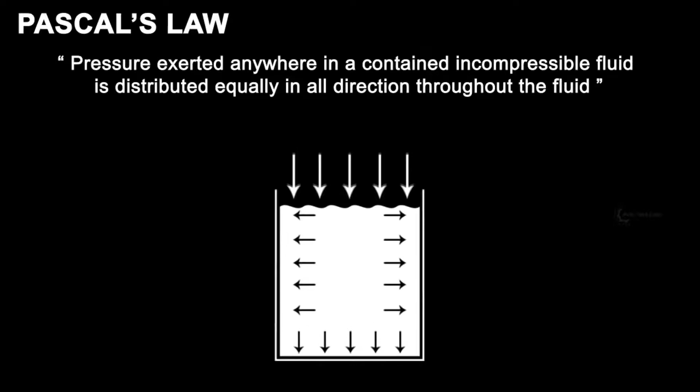Our design uses the principles of Pascal's law, which states that the pressure exerted anywhere in a contained incompressible fluid is equally distributed in all directions throughout the fluid. As the driver applies a force on the brake, the same force is distributed to the pressurized fluid. The force is then amplified by increasing the contact area near the brake pad.

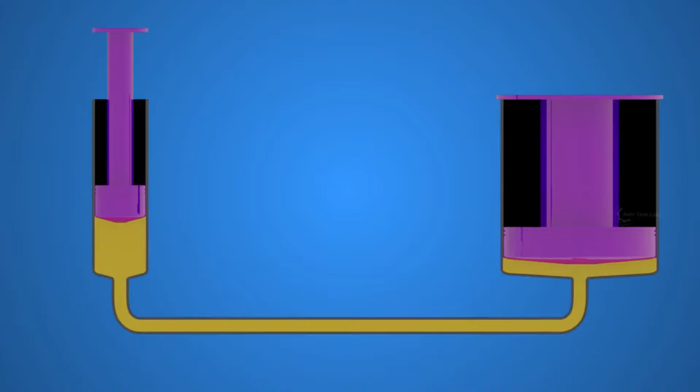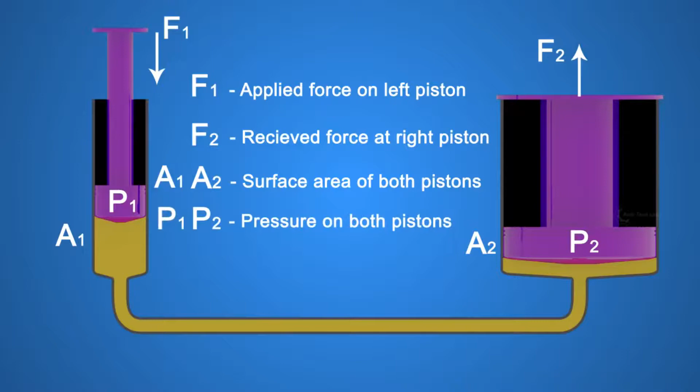This force provided from the driver allows the first brake pad to come in contact with the rotor. As the first brake pad comes in contact with the rotor, the equal and opposite force exerted by the rotor is then transferred to the caliper frame, translating the system in order for the second brake pad to come in contact with the rotor. The frictional force provided by both brake pads decelerates the rotor, allowing the vehicle to stop on demand.

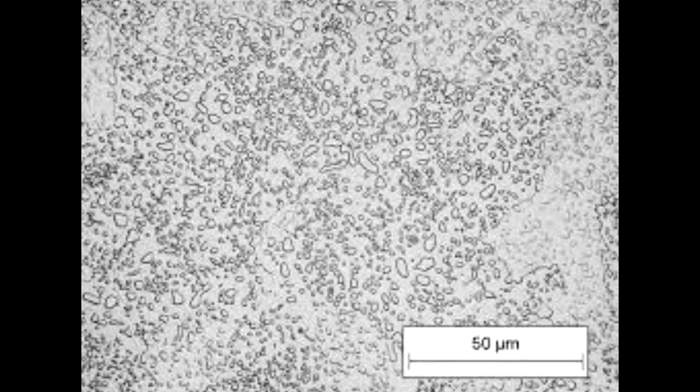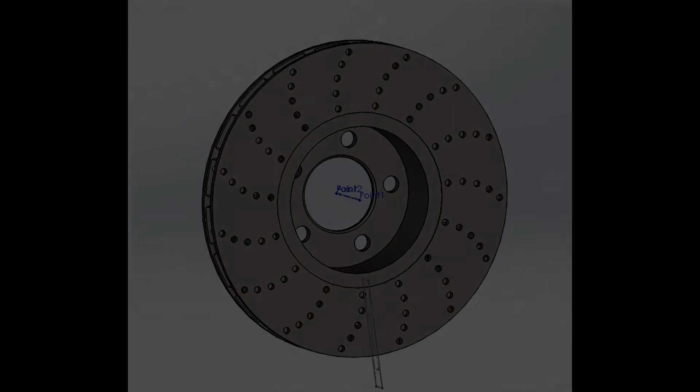Our design consists of several parts that are essential to building the product. Most parts are made of cold-drawn steel, such as the rotor, frame, screws, brake pad, and the connecting rods. The rotor has a diameter of 290 millimeters and is 50 millimeters high, with a mass of 6 kilograms. The frame has a length of 252 millimeters, 100 millimeter width, and 100 millimeter height, with a mass of 2 kilograms. The screws have an 8 millimeter diameter and a weight of 4 grams.

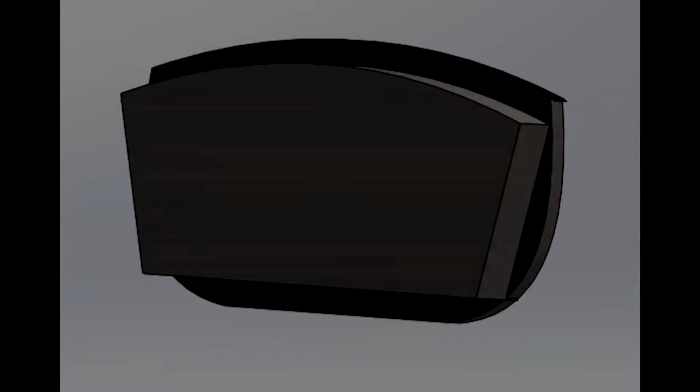The brake pad has a length of 120 millimeters, width of 60 millimeters, 20 millimeters high, and a weight of 621 grams. Connecting rods have a diameter of 3.25 millimeters and a mass of 6 grams. Cold-drawn steel was chosen for its high yield strength for when the friction process occurs. Another part, the rubber bellows, are made of rubber and have a diameter of 24 millimeters, height of 40 millimeters, and a mass of 10 grams.

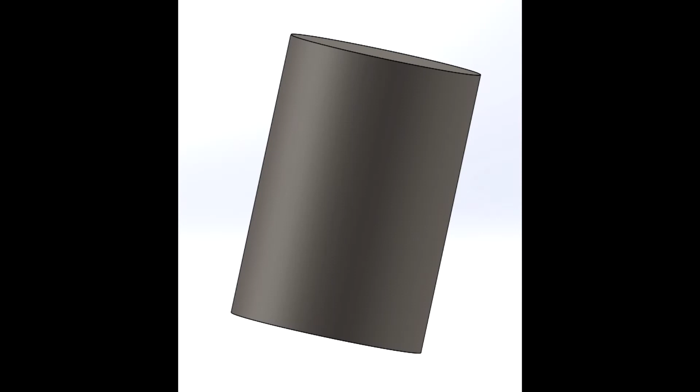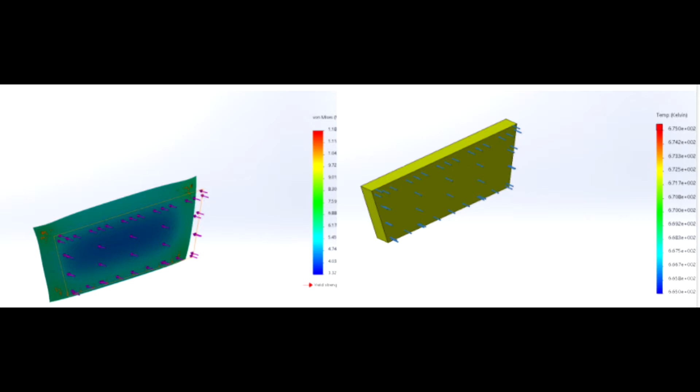When doing our FEM analysis, we looked at the main stresses on our design. This would be a force of 2.7 kilonewtons on each brake pad and also the heat due to the friction of the rotor and brake pad rubbing together. We specifically looked at the brake pads, the screws, the shells, and the rotor. In our design, we figured that the most at-risk parts would be the brake pad and the screws, as they might be the weakest part of our design and take the most force.

Doing our analysis, it showed that the brake pad would only deform by 0.001 millimeters. We have a very similar situation with the screws. They only deform slightly as well. In conclusion, the screws and the brake pads would be able to successfully take the loading conditions.

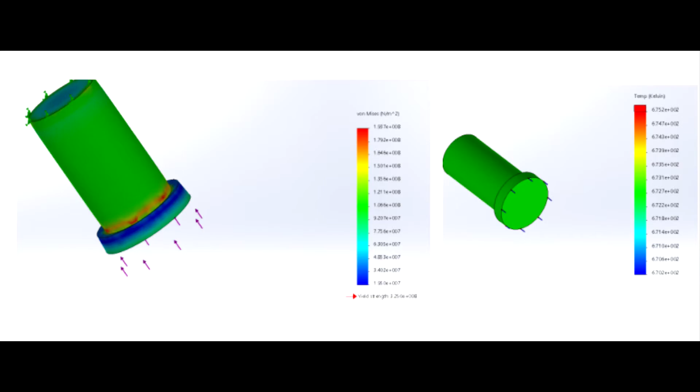Next, we did our fatigue analysis. Although the pads and screws were able to take the stresses in one instant, we needed to test that they could last a long time, ideally an infinite life. When we did the fatigue analysis, all the components except the screws gave us results that there would be no fatigue in the infinite cycles. For the screws, the test showed that a very small part beneath the head of the screw would have some fatigue after a million cycles.

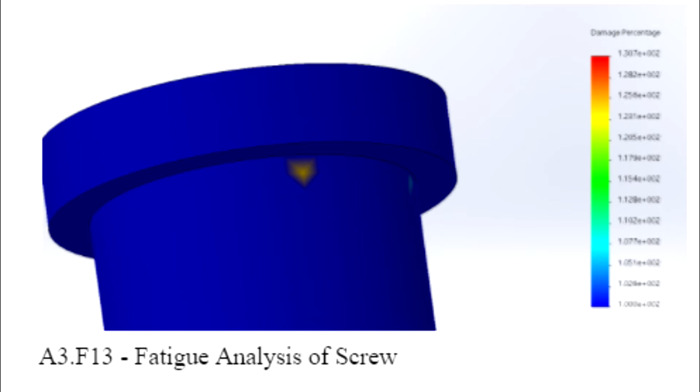Although it was a very small fatigue, it still jeopardizes the safety of our design. To combat this, we can make the design of the screw shorter so that the body can withstand more stress, or we can do a routine checkup to replace the screws every now and then. Overall, the factor of safety of the entire structure ranged from 1.6 to 978, proving that the design will be safe. Alright, now we'll be doing our improvement section.

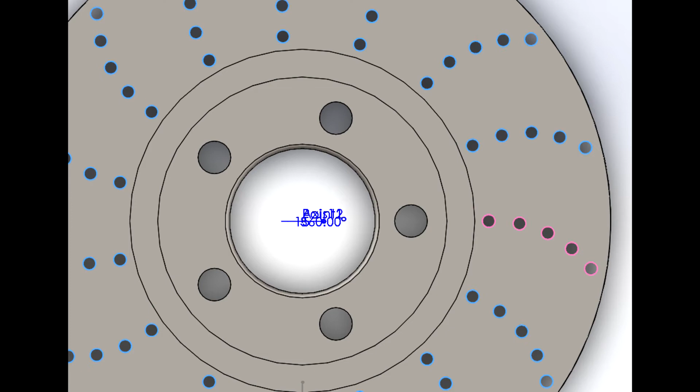Our design features a few improvements that help it perform optimally. One of these includes small holes in the rotor that are placed in a concentric manner. The holes increase heat ejection by increasing the surface area for convection to occur between the air and the material. Another improvement we made was to the caliper frame. We made it thicker in order to withstand more stresses. By doubling the thickness of it, we found that it had a much safer outcome and overall increased the factor of safety.

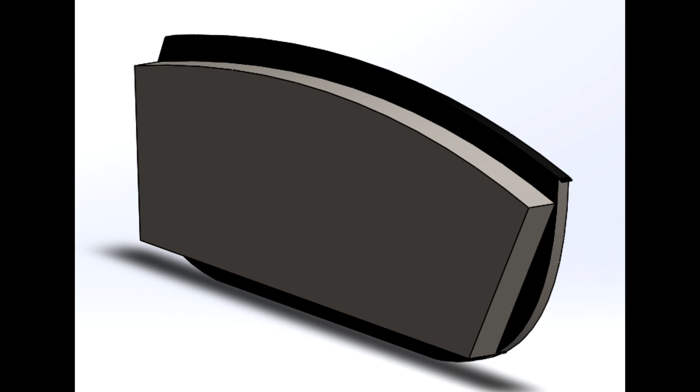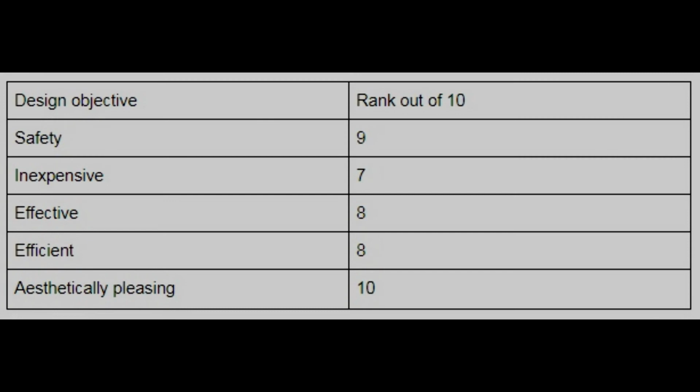The last improvement we made was to directly attach the brake pads to the caliper frame without the use of the caliper bracket, as it would add unnecessary risks to our design. Once the design was finished, we ranked our design objectives based on the criteria that we initially arranged to complete. We originally set out for our design to be effective, efficient, safe, inexpensive, and aesthetically pleasing, with an emphasis on safety and effectiveness. We accomplished these objectives by increasing the amount of material we used on selective parts relative to other on-the-market products.